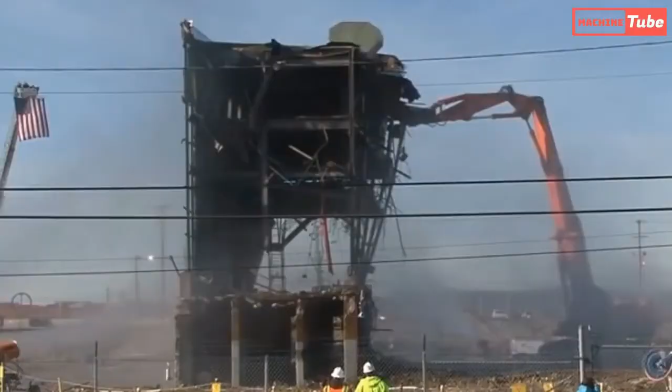Nature has an entire suite of disasters at its disposal, and some are more difficult to predict than others, like earthquakes. Earthquakes are basically impossible to predict with any real certainty. As we live in an earthquake-prone area, we realize a fundamental truth: earthquakes don't kill people, but buildings do.

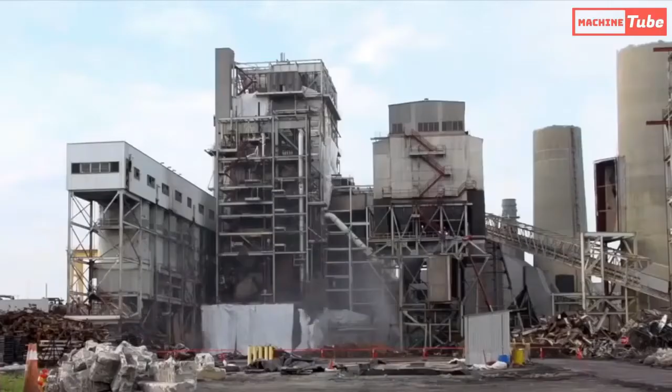Researchers have spent a lot of time wondering how to make buildings safer. So does our group. We intend to give the building an invisible cloak that could give full protection to the buildings. Stay tuned with us to understand more about this project.

Objective of the study: first, to study about seismic waves that are generated during an earthquake. Second, to study about the best material that can absorb and give path for a seismic wave during the earthquake.

Significance of the study: the finding of this study will be a significant endeavor in promoting a better idea to prevent a building from collapse during any havoc wreaked by the force of nature.

The greater demand for high-rise design and construction of buildings justifies the need for a stronger foundation of a building to be designed. Therefore, a building that applies the recommended approach derived from the result of this study will be able to stay long-lasting.

In addition, this study will be beneficial as the building can be maintained properly, free from any damage, and reduce a costly repair bill. The finding of this study will serve as a good source of accurate and useful information for future researchers themselves. Thus, a new design for making a building keep standing during an earthquake may be arrived at.

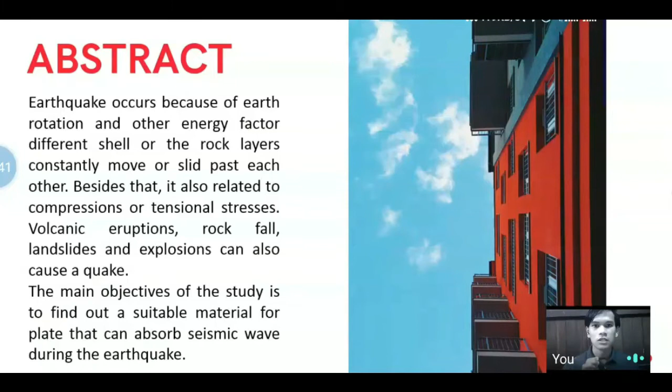The main objective of the study is to find out a suitable material for a plate that can absorb seismic waves during the earthquake.

Introduction: Do you wonder why we chose the title Immortal Construction? It is because we want to build a building that will stand everlasting and become invisible to natural earth disasters, using a plate that can give the wave a way to travel without hitting the building.

Earthquakes are something that cannot be predicted and can violently shake a building. Malaysia is close to rumbling areas and will not be forever resistant to earthquakes. Most of the nation may feel that the country is generally free from any major active seismic activities as a consequence of its strategic location.

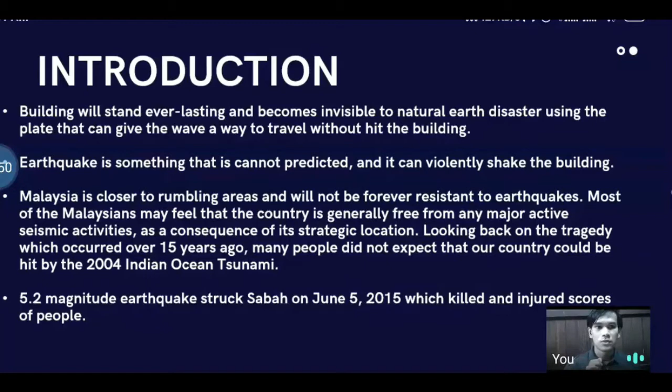Looking back on the tragedy which occurred over 15 years ago, many people did not expect that our country could be hit by the 2004 Indian Ocean tsunami. On June 5, 2015, a 5.2 magnitude earthquake struck Sabah, which killed and injured scores of people.

Literature review: Natural earthquakes are the shaking of the Earth's surface caused by a sudden release of elastic energy from a geological fault, generating a mechanical wave called a seismic wave. The greatest hazard in an earthquake is the collapse or fall of man-made and natural structures, causing extensive loss of life and property.

There are three basic types of seismic waves: first is P wave, second is S wave, and the third is surface wave. The energy released by the disturbance propagates away from the source of the disturbance as seismic waves.

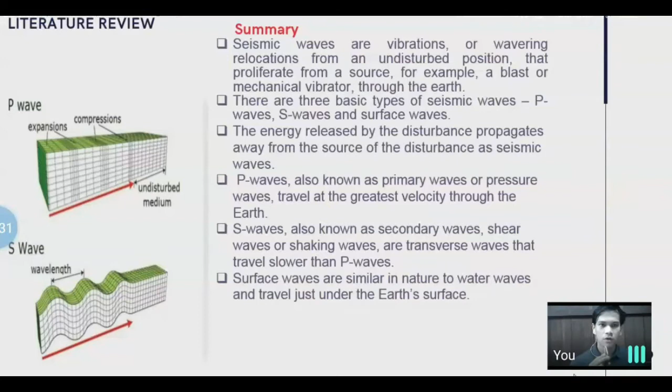P wave, also known as primary wave or pressure wave, travels at the greatest velocity through the Earth. S wave, also known as secondary wave, shear wave, or shaking wave, are transverse waves that travel slower than P wave. Surface waves are similar in nature to water waves and travel just under the Earth's surface.

The earthquake cloak ideas come from researchers in the United Kingdom, Italy and France, some of whom were the first to show that the physics of an invisibility cloak could have other applications, designing a cloak that could render objects invisible to destructive storms, waves or tsunamis.

The seismic waves of an earthquake fall into two main groups: body waves that propagate through the earth, and surface waves that travel only across the surface. By tuning the cloak's properties, that path can be made to be an arc that directs surface waves away from an area inside the cloak.

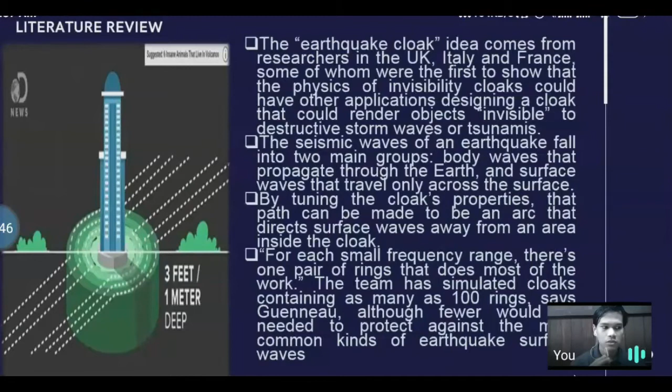For each small frequency range, there's one pair of rings that does most of the work. The team has simulated cloaks containing as many as 100 rings, says Guenneau, although fewer would be needed to protect against the most common kinds of earthquake surface waves.

Metal rubber is a permeable structure formed by tightly squeezing metal wire wound into flexible components, shaped and scaled, which can additionally be framed into vibration isolators. In vibration isolation systems, the effectiveness of vibration isolators based on metal rubber material is primarily dictated by its elastic and strength properties. Metal rubber has a wide range of possible applications, from mechanical flexible electrical interconnection and electromagnetic shielding to the measurement of large mechanical deformations.

Shape memory alloy superelasticity is a different property that makes it superelastic, excellent for seismic reinforcement. A shape memory alloy with superelasticity may instantly restore its initial form, even from its inelastic deformation.

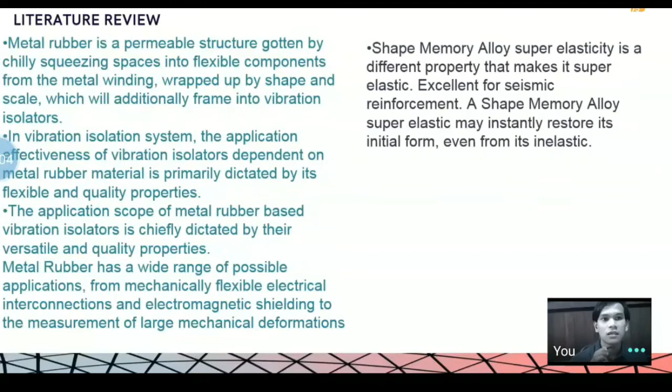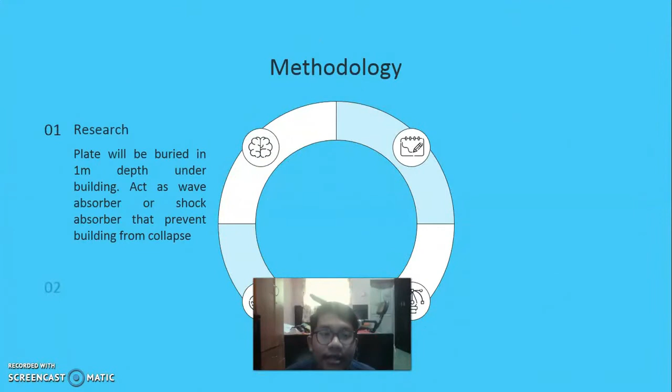From what we have studied, the plate will be buried 1 meter deep under the building. The plate actually acts as a wave absorber or shock absorber that will prevent the building from collapsing during the earthquake.

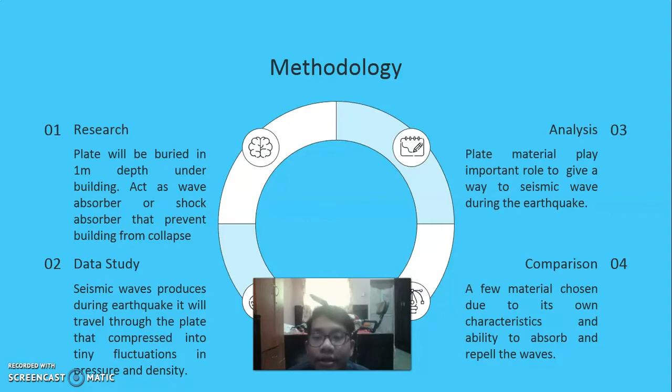During the earthquake, seismic waves are produced that contain body waves and surface waves. The wave will travel to the plate and be compressed into tiny fluctuations in pressure and density. The plate material plays an important role in giving way to seismic waves during the earthquake. A few materials had been chosen for their own characteristics and ability to absorb and repel the wave.

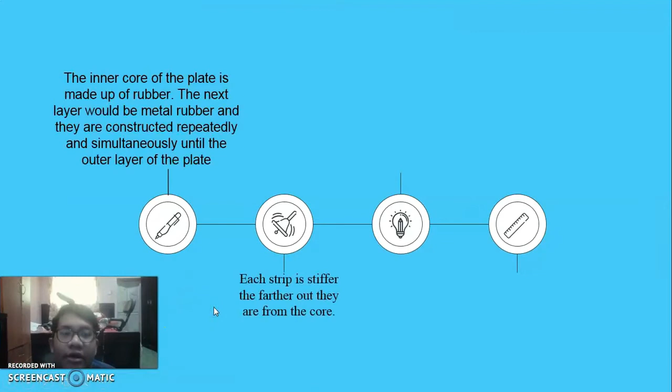The inner core of the plate is made out of rubber. The next layer would be metal rubber, and they are constructed repeatedly and simultaneously until the outer layer of the plate. Each strip is stiffer the farther out they are from the core.

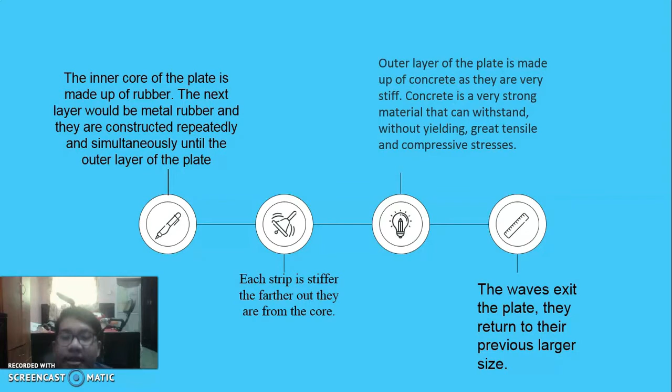The outer layer of the plate is made out of concrete. Concrete is a very strong, stiff material that can withstand great tensile and compressive stress without yielding. As the wave exits the plate, the layers will return to their previous larger size.

Next is the result. Rubber has been chosen as the inner material of the plate.

Rubber also has ease of handling and installation, energy storage capacity, and an ability to convert some energy to heat when it is deflected. Natural rubber without fillers exhibits very little hysteresis, and as a result it provides energy dissipation or damping in a system subject to vibrational force.

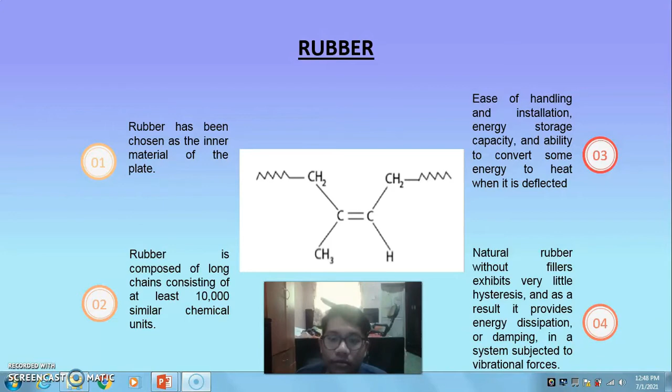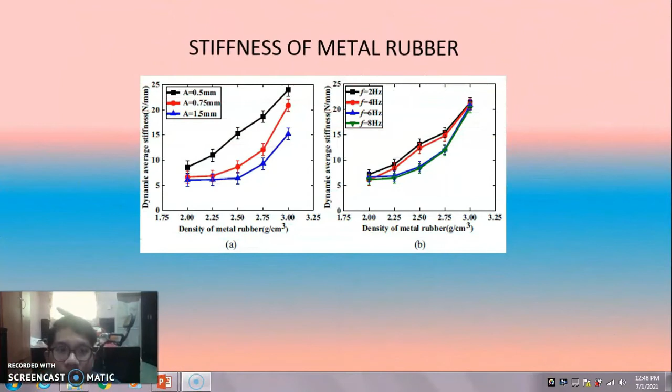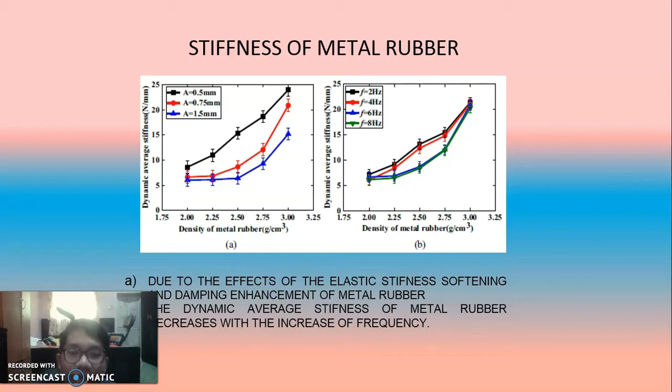Stiffness of the metal rubber: Figure A shows the graph of the effect of elastic stiffness softening and damping enhancement of metal rubber. The dynamic average stiffness decreased with the increase of amplitude. For Figure B, the dynamic average stiffness of metal rubber decreased with the increase of frequency.

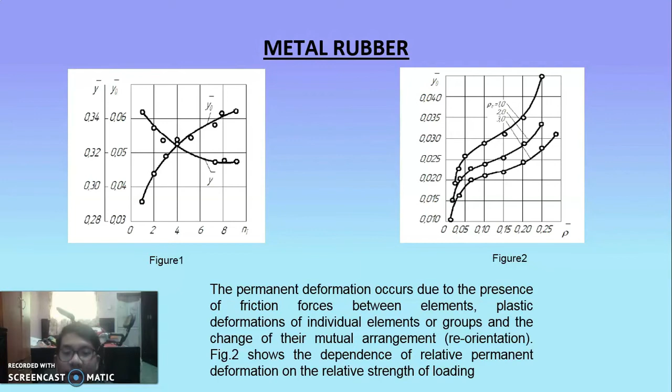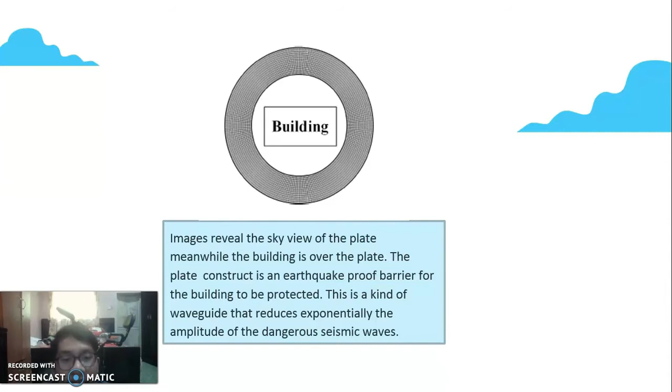The image reveals the sky view of the plate, while the building is over the plate. The plate is constructed as an earthquake-proof barrier to protect the building during an earthquake. It is a kind of waveguide that exponentially reduces the amplitude of the dangerous seismic wave.

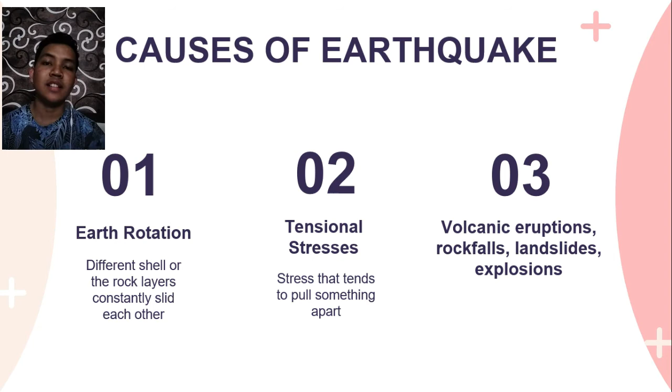The causes of earthquake could be earth rotation, where different rock layers constantly move or slip past each other. Besides that, tensional stress can also cause earthquakes to happen. Tensional stress is a stress that tends to pull something apart. Lastly, natural disasters such as volcanic eruption, rockfall, landslide, and explosion are also considered causes of earthquake.

Our project was inspired by two pieces of research. The first was from researchers in France, who proposed an idea to protect buildings against earthquakes with a seismic invisibility cloak. In theory, the idea may be applied to build defensive barriers that redirect earthquake energy away from the building. The second was from a study posted in the journal Creative Infrastructure Solutions, where they proposed that a building district could be considered a set of above-ground resonators.

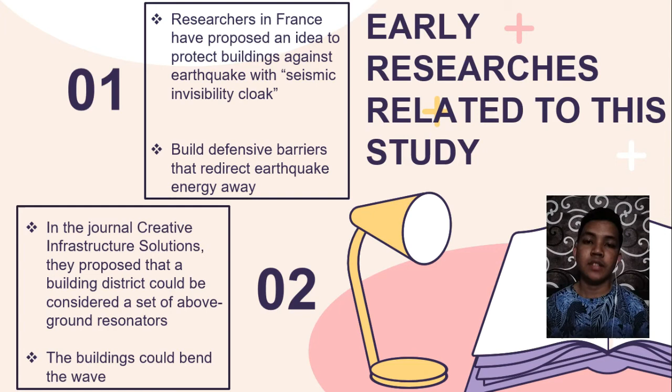In short, they mean that the building may be used to dissipate the energy of the seismic wave. Alternatively, the building could bend away the wave. As a result, we propose to design a plate, which has been discussed in the methodology.

Since this study is related to earthquakes, research on seismic waves generated during earthquakes was also carried out. Basically, there are two types of seismic waves: surface wave and body wave. We only focus on body wave in this project because body waves are more destructive than surface waves. A body wave is a seismic wave that travels through the interior of the earth, divided into two types: the P wave and the S wave.

So this is the P wave equation and the S wave equation. This equation describes the seismic longitudinal wave and shear wave. Therefore, the wave velocity of P wave and S wave are also stated here.

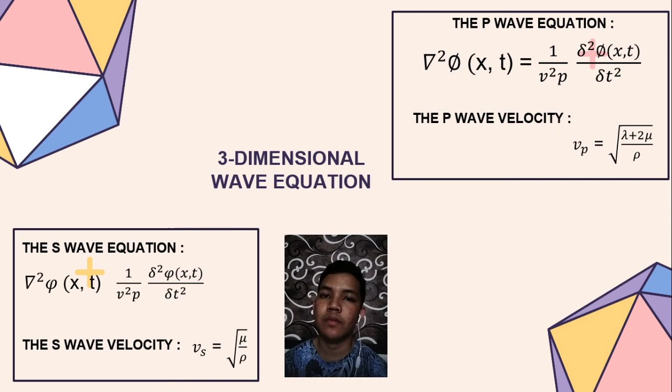In conclusion, this final year project report has proposed a method to protect buildings against seismic waves generated during an earthquake by burying a 1 meter depth of plate underneath the ground. On top of that, research on seismic waves was done to relate to the properties of the plate suggested in this project, to ensure the plate can give successful protection to the building.

The plate is suggested to comprise a large number of concentric rings made of different types of materials. Each ring would have different stiffness and elasticity to be controlled so the wave can pass smoothly through the materials. By tuning the properties of the material of the plate, the path can be made into an arc that directs surface waves away from the plate.

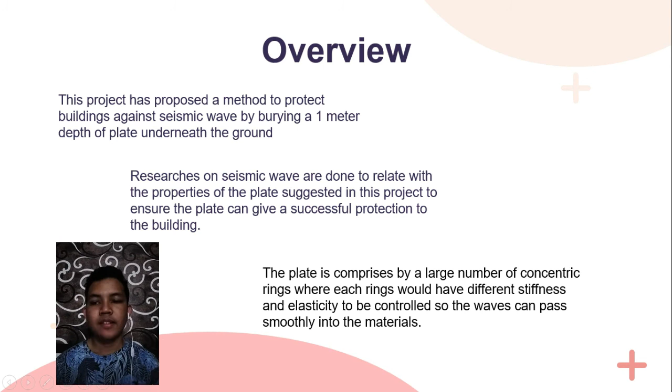For future projects, hopefully the concept of the metamaterial approach in this study can be designed successfully and produce the expected result. This plate can give an invisible cloak to the building to withstand the earthquake.

It is essential to ensure correct construction of the plate from the core to the outer layer, which is challenging because their properties need to be tuned to direct the waves away from the building. Therefore, more study and research has to be done on that matter in order to make this plate a successful method to protect buildings against natural disasters.